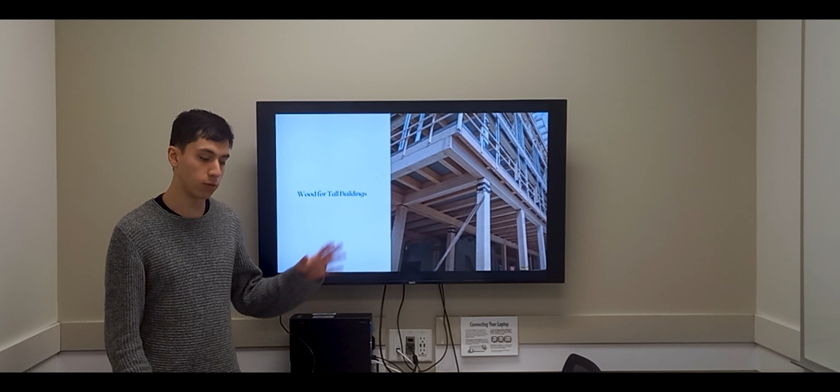So the importance of innovation in an industry such as construction, which is very conservative and very traditional, is that wood for tall buildings tries to make things simpler, more profitable, and also more sustainable, which is the ultimate goal of this technique.

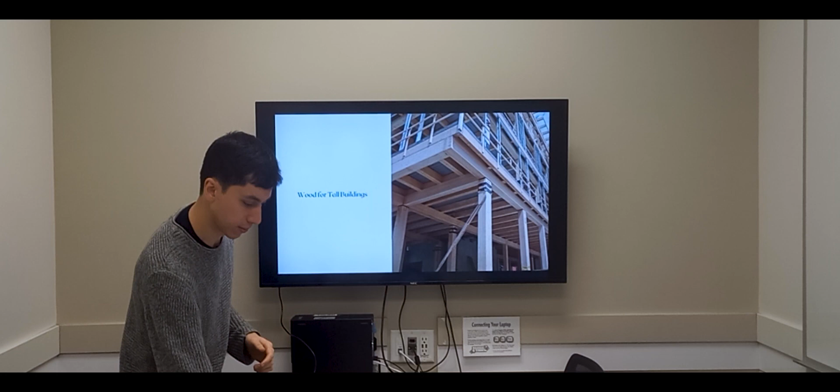Timber has been used traditionally in the construction industry, especially in the Anglosphere, where it was mainly used for residential housing. It started in Great Britain, and because Great Britain was a fairly small island, the sourcing of timber was very limited. So they had to come up with new solutions, such as concrete structures, things that were not renewable, but that were easy to source anywhere in the world.

Another thing that happened after that was the implementation of steel structures, which allowed for skyscrapers and tall buildings with very huge spans. But of course, it developed a lot of toxicity and a lot of pollution.

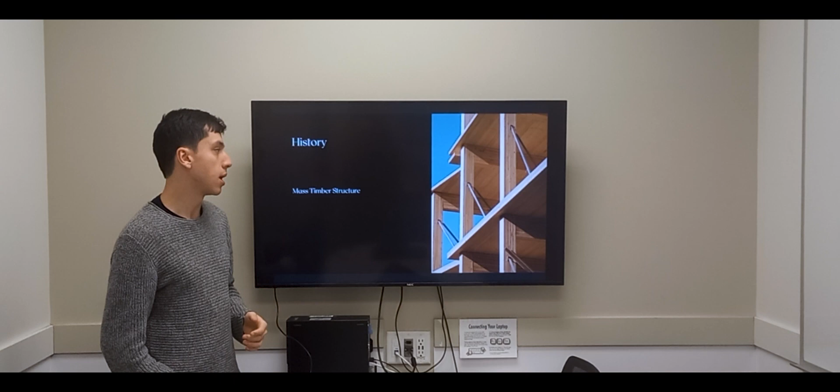Recent trends point to mass timber as the predominant construction technique in the world, and the reason has to do with the previous two. To make concrete structures, you need a lot of material that ends up going into waste. The beauty of mass timber is not only the source of the material, but also the fact that you don't need to use a lot of material that ends up going into waste. What you use is what you end up having in the building. So there are fewer steps to make it happen, and it also makes it more affordable to build.

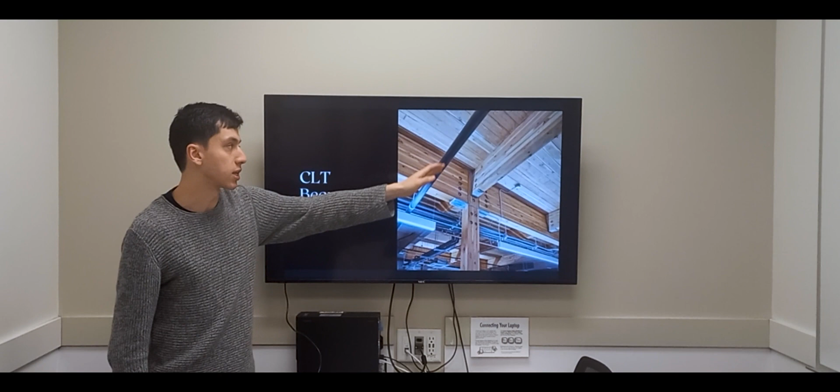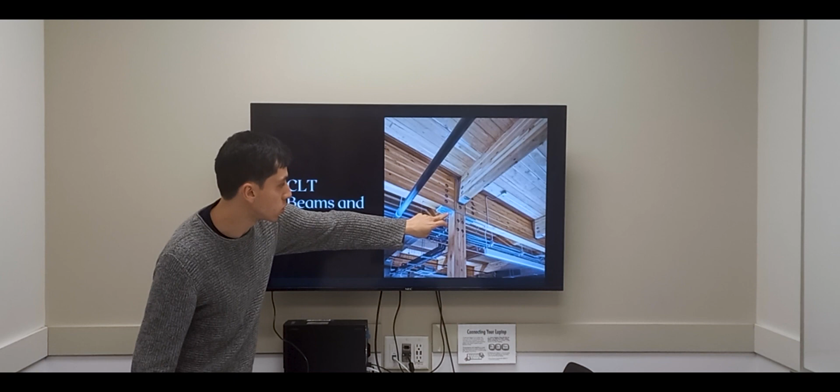So the latest trend that allowed mass timber to happen was the implementation of cross-laminated timber, shortened as CLT. What this makes possible is long spans, and tall buildings. CLT beams and columns, as you can see, most architects and designers like to leave exposed for the beauty of wood as an architectural finish. And you can see most of its joinery is made out of steel plates and bolts, but the overall beams and columns are made out of cross-laminated timber.

The strengths of mass timber are that it's made out of renewable material, manufactured in factories prior to getting to the job site, having high precision joinery from the factory, reducing the need for skilled labor, easy installation when reaching the job site, quick assembly compared to steel or concrete, no need for extra disposable material, no need to cover with sprays or drywall. Components are the final finish. Components are lightweight and have tolerance to vibration and seismic movement. Easy to estimate amounts with minimum waste, cost effective, and less waste on disposable materials overall.

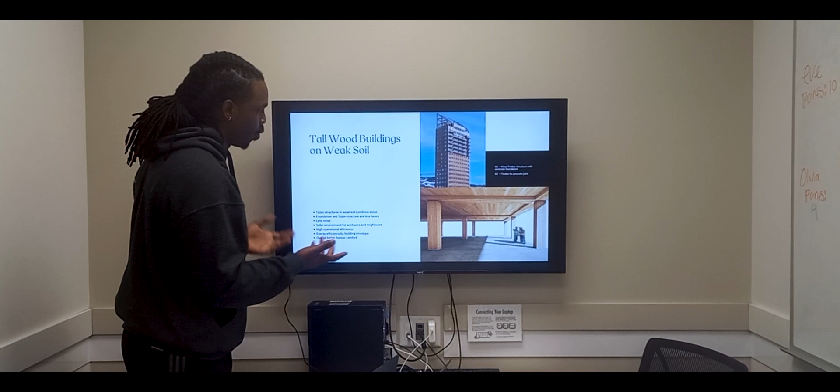Firstly, we're going to talk about tall wood buildings on weak soil. All right. So we're talking about timber and using timber. So why is it best? Why does wood work better for weak soils? First of all, using wood or timber for constructing buildings allows you to build taller buildings on soil that cannot hold heavier materials. So that's why we are talking about this now.

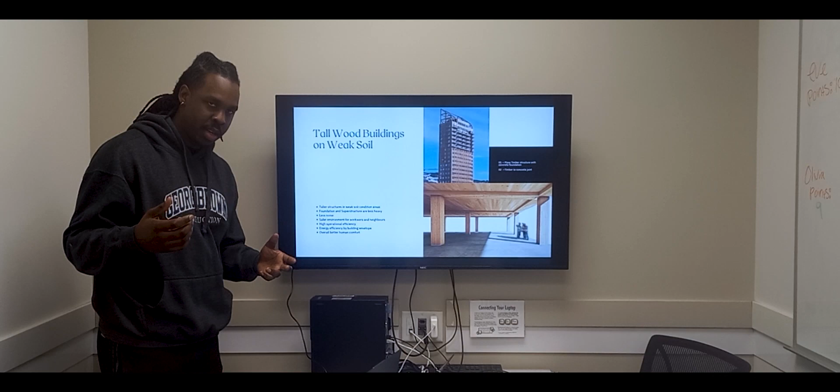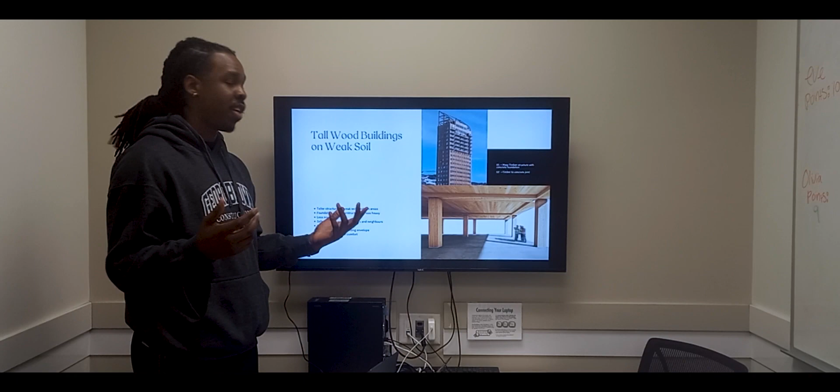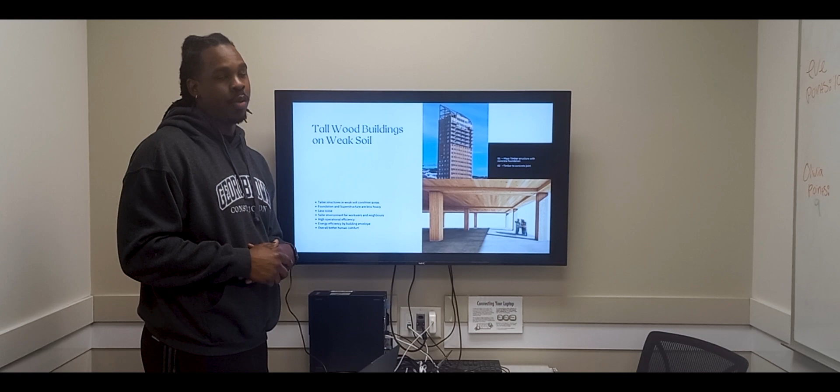We have foundation and superstructure. Basically, timber is lighter compared to concrete or steel. It provides a safer environment for workers and neighbors. Less noise as well. Working with metal downtown, for instance, there's a lot of clanging, so neighbors around might complain about the noise. And heavier materials mean more risks for workers. So it's a safer environment for workers and neighbors.

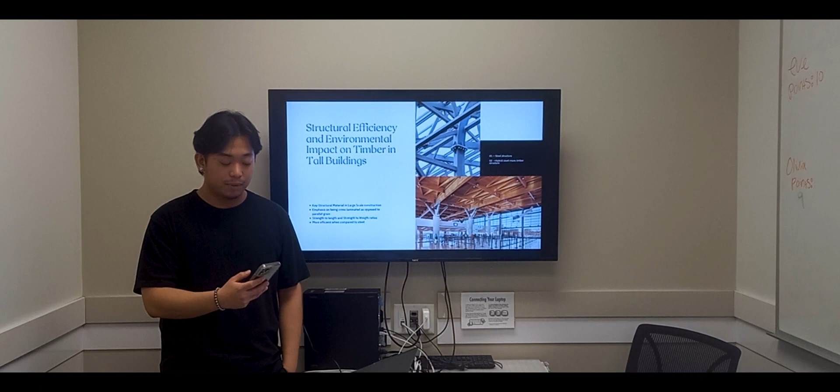So the first point is key structural material in large-scale construction. Timber plays a crucial role in large-scale construction, alongside materials such as steel and reinforced concrete. And its environmental advantages are maximized when strategically used for structural efficiency.

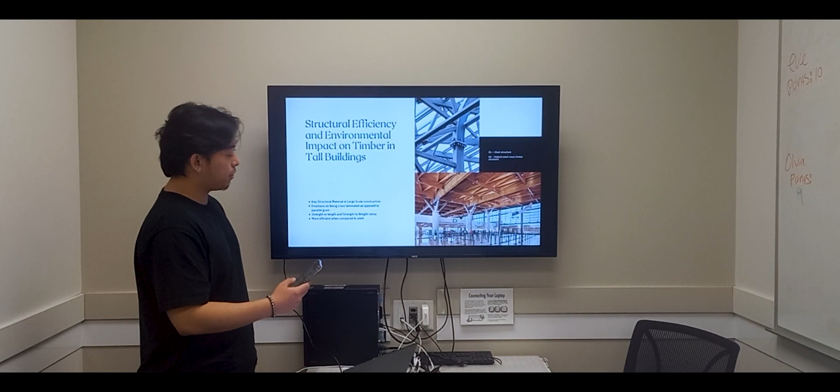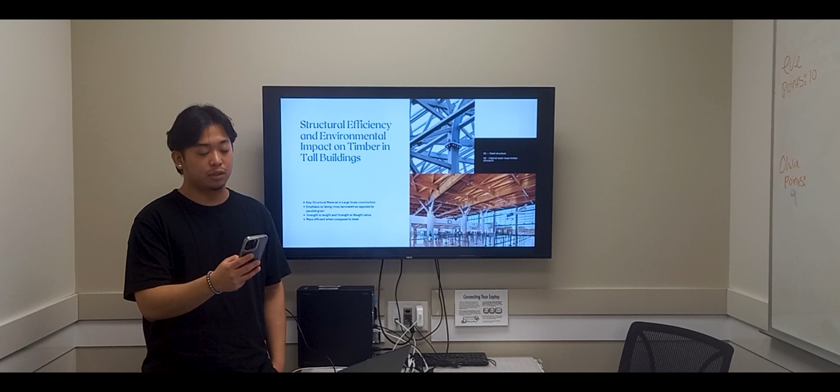The next point is emphasis on being cross-laminated as opposed to parallel grain. Timber strength parallel to the grain is comparable to reinforced concrete, but it lacks in compression strength against modern high-strength concrete. So, taller wood buildings and fire safety, existing evidence about large wood construction.

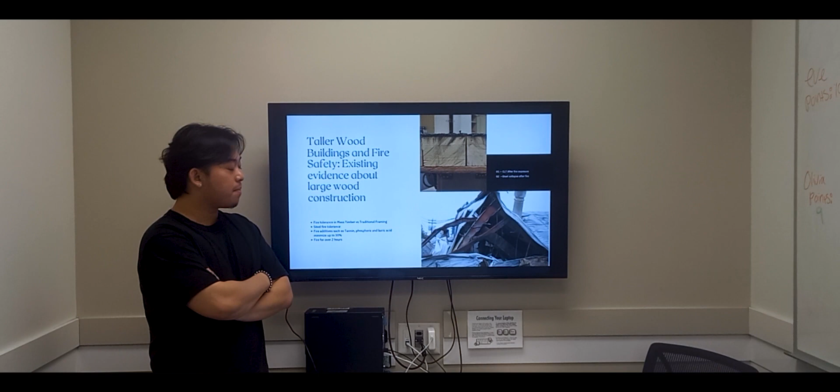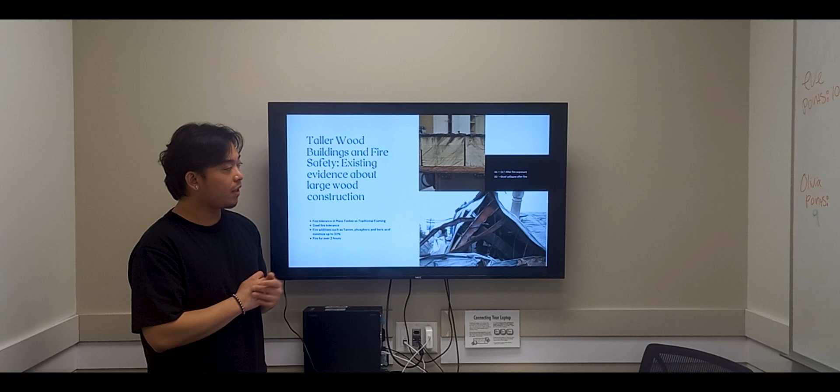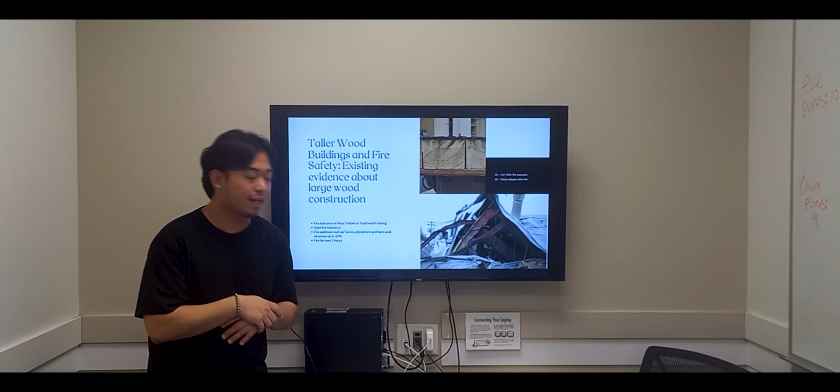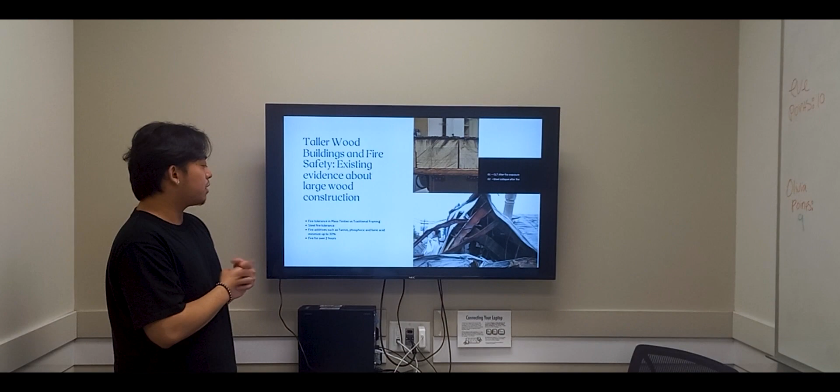There are two main reasons for that. The first one is the wood density, and the second one is the fire additives, which have to be present in the CLT to make it stronger. Those additives are tannin, phosphoric, and boric acid, and they minimize the possibility of collapse up to 30%. And the fire could go on for about 2 hours without breaking down the structure.

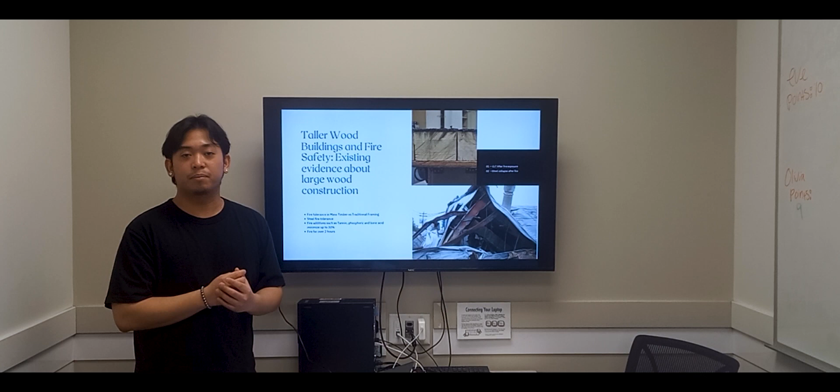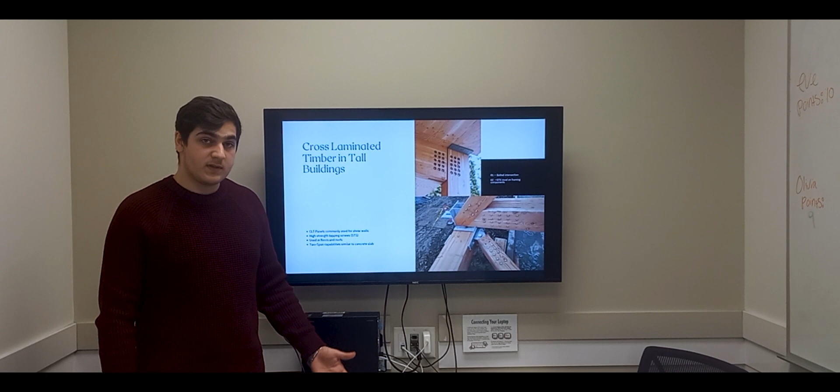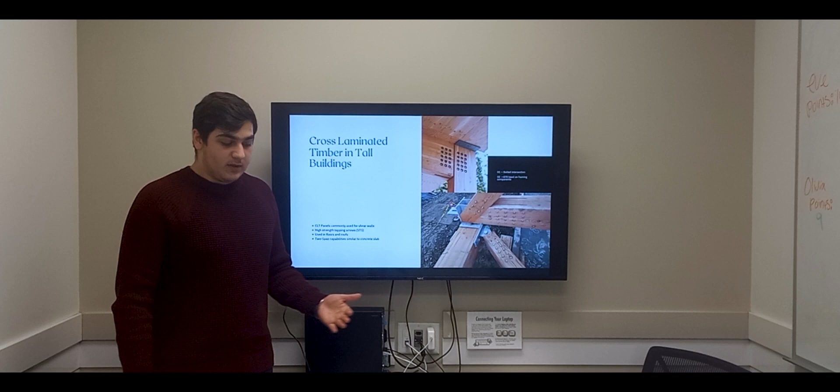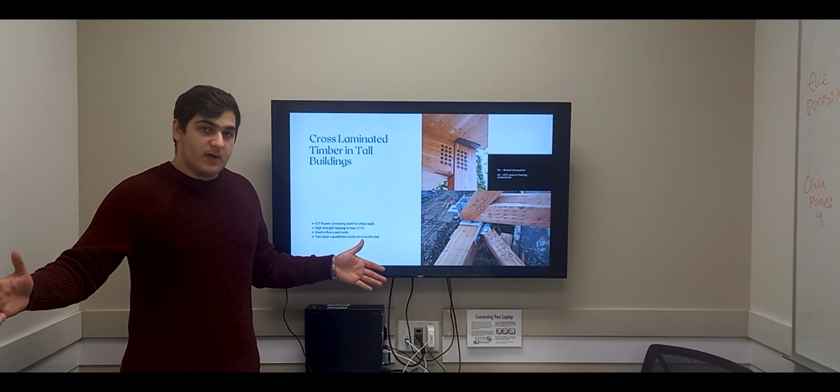Another research that we made is cross-laminated timber in tall buildings. CLT panels are commonly used for shear walls. What allows us to use them there is high-strength tapping screws. We need them because in high-rise buildings we can't have any wood-to-wood connections because of fire resistance. It also allows us to use it in floors and roofs, and we also have two-way span capabilities similar to concrete slabs. It means the slab is longer than the lumber slab we usually use.

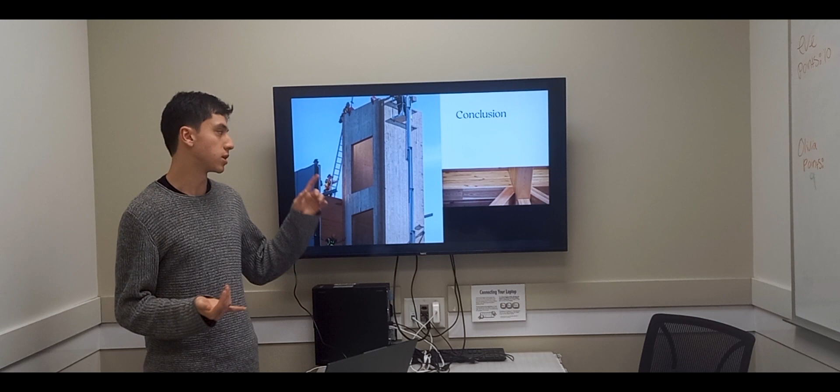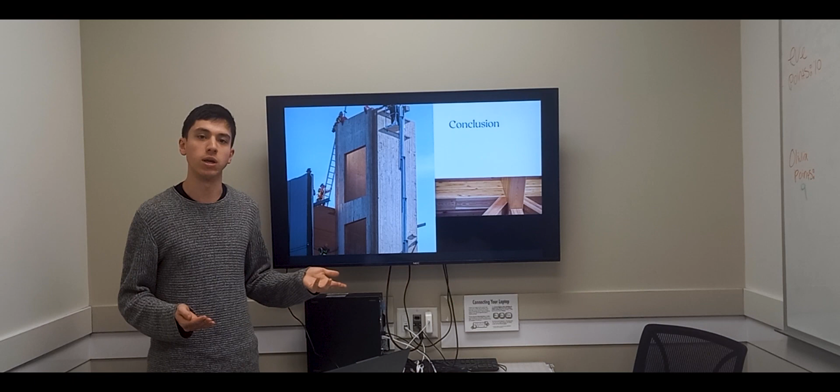So now to conclude, mass timber structure in mid-rise and high-rise buildings is an innovation to the industry because of many of the reasons we have explained, such as sustainability, environmentally suitable designs, its profitability for the construction business, and also the fact that you can minimize time frames significantly and build overall better buildings that take care of the environment, take care of the budget, and help shape the city in a better way.